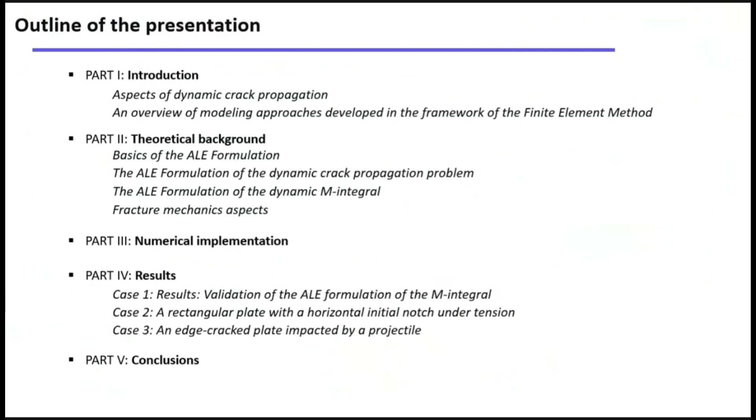Here is the summary of the presentation. The presentation is structured in 5 parts. In part 1, I will explain the motivation of this work. In part 2, I will resume the theoretical background at the base of the proposed numerical model. In part 3, I will discuss some aspects concerning the numerical implementation. In part 4, I will show you some interesting results that we have obtained by applying our methodology to the analysis of some relevant benchmark cases. And finally, in part 5, I will outline the main conclusions of the work.

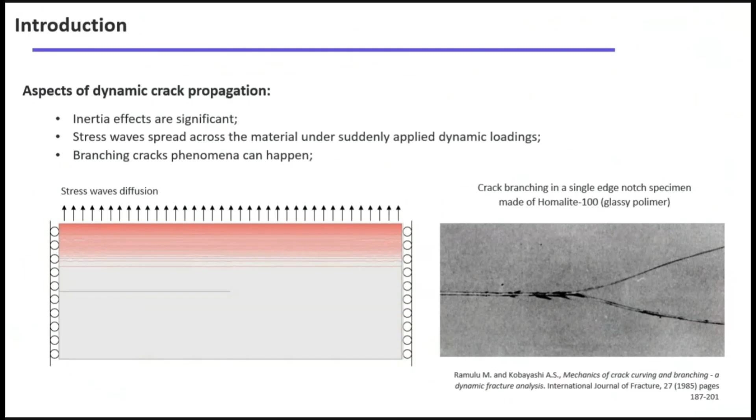As you can imagine, simulating this kind of phenomena using a numerical method could be a very challenging task. In the literature, you can find many numerical methods that tackle this problem. Here I try to broadly classify these methods according to the way they represent the crack. You can find smeared crack approaches and discrete approaches. Smeared crack approaches account for the presence of the crack at the constitutive level, meaning this method, in the region of the crack, reduces the elastic properties of the material. An example is the phase field method. On the other hand, discrete approaches represent the crack as an internal geometrical discontinuity. An example are models based on the cohesive zone models, and these models offer a very accurate representation of cracks.

However, each method, regardless of whether it belongs to the class of smeared crack approaches or discrete approaches, has advantages and disadvantages. So currently, it is impossible to identify the best numerical method that ensures accurate results and at the same time high computational efficiency. During the last years, many efforts have been spent to develop a novel class of numerical methods, the so-called hybrid methods, that combine standard procedures to take the most advantages while reducing the main drawbacks. So hybrid methods are very promising and could be considered the future of computational fracture mechanics.

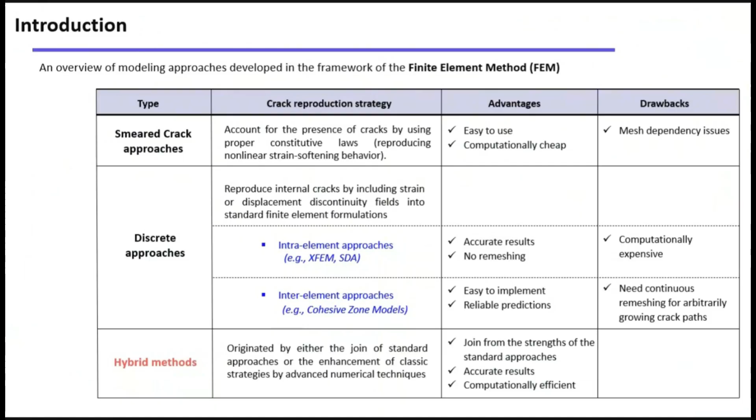In this framework, we have tried to develop a hybrid method to simulate dynamic crack propagation mechanisms inside brittle materials. In particular, the proposed method has been developed within a standard finite element code, augmented with the use of the moving mesh technique based on the arbitrary Lagrangian-Eulerian formulation. This technique is used to reproduce the geometry variation of the computational domain due to the propagating crack. In addition, we have implemented the interaction integral method. This is used in the proposed method to evaluate essential fracture variables, I mean the dynamic stress intensity factors, which are essential to evaluate the direction of propagation and also the crack propagation velocity.

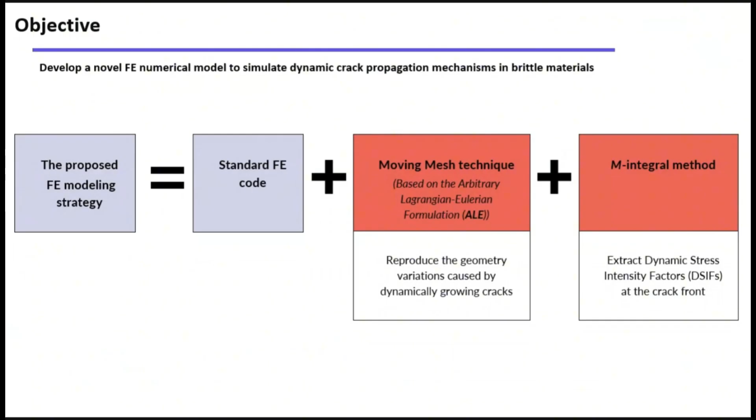So before introducing the governing equations at the base of the proposed numerical method, it's useful to explain some basic concepts at the base of the Arbitrary Lagrangian-Eulerian formulation. The use of the Arbitrary Lagrangian-Eulerian formulation introduces a novel system of coordinates that coexists with the traditional material and spatial frame. The novel system is known as the referential system, and the referential coordinates identify the spatial position of the nodes of the computational mesh.

Each system, I mean the material, spatial, and referential system, are linked to each other by means of a proper set of mapping functions. In addition, the use of the ALE formulation requires that all the governing equations of the problem under investigation should be stated in the referential system. This means that traditional governing equations, for example of solid mechanics, that are expressed in the material frame, should be restated in the referential system.

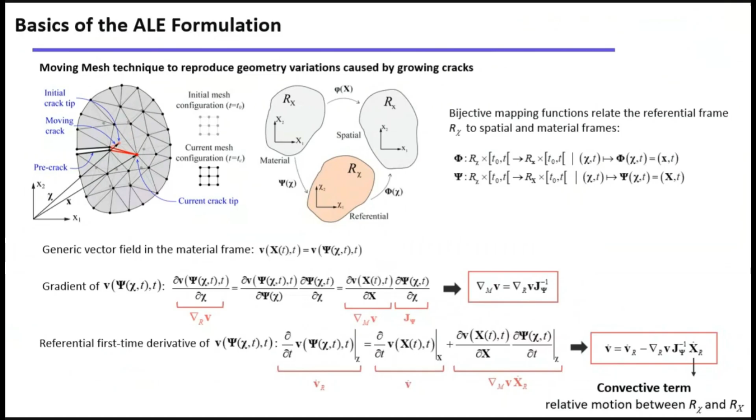If we consider that these equations contain gradient operators or first-time derivatives, these operators should be stated in the referential system. So we can use these expressions, the relationship that links the gradient and the first-time derivative from the material to the referential frame. Taking this expression in mind, we are now ready to introduce the governing equations at the base of the proposed numerical methods.

In particular, we have two sets of governing equations. The first are the governing equations on solid mechanics, expressed in weak form with respect to the material frame. Using the above expression, we are able to define these governing equations in the referential frame.

The second set of governing equations are those associated to the moving mesh problems and govern the kinematics of the movement of the computational nodes. These governing equations are generally known as Rezoning methods, and here we have used a Rezoning method based on a Laplace approach.

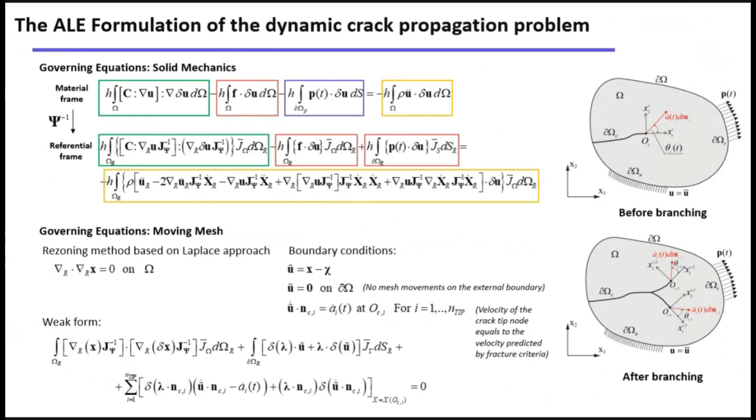So we have to solve these differential equations under a proper set of boundary conditions. In particular, we use a boundary condition that imposes that the computational nodes around the boundary of the computational domain should be fixed. Another boundary condition imposes that the computational node associated to a crack tip advances in the direction of propagation, with a certain crack propagation velocity evaluated using proper fracture criteria.

Another important concept is the use of the interaction integral method. The interaction integral method is derived by applying the traditional J-integral expression to a superimposed state formed by the combination of the fields of the problem under investigation—I mean the stress, displacement, and deformation fields—and auxiliary fields for which stress intensity factors are known.

To evaluate the dynamic stress intensity factor of the problem under investigation, one has to evaluate two main integral expressions: the first associated to an auxiliary field of pure Mode 1, and the second to an auxiliary field of pure Mode 2. So we get two values of the interaction integral, and these values allow us to evaluate the dynamic stress intensity factors of the problem under investigation.

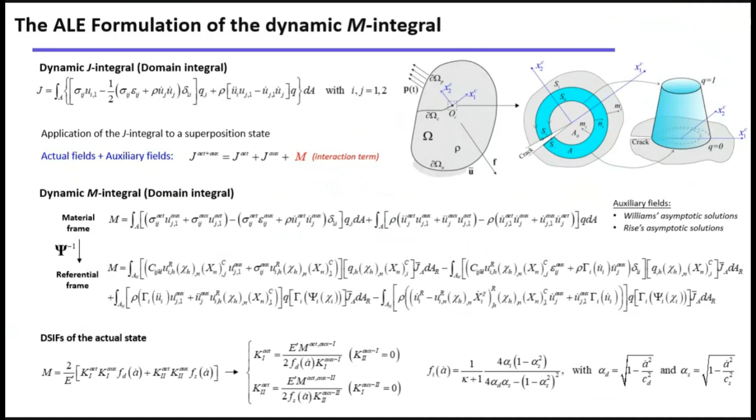How does the proposed model evaluate the direction of propagation? We have used the maximum circumferential stress criterion developed by Erdogan and Sih, and this criterion provides an expression for the kinking angle that defines the direction of propagation, as well as an equivalent stress intensity factor that we use to define several fracture functions governing the crack initiation instant and the crack growth process.

These functions are defined in terms of some material properties, namely the dynamic crack initiation toughness and the dynamic crack growth toughness. In addition, we have introduced fracture functions that define the instant of crack branching.

In particular, the proposed method is quite flexible to implement fracture functions based on the velocity criterion—that is, when the crack propagation velocity reaches a critical value, crack branching events occur—or fracture functions based on the critical value of the stress intensity factors.

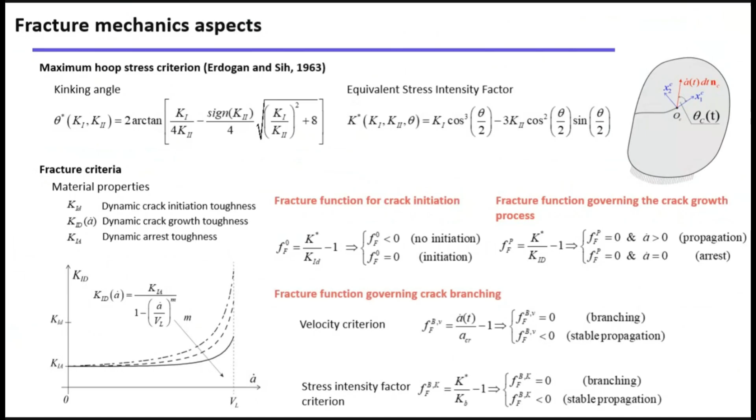Now I'll show you some aspects concerning the numerical implementation. We have implemented the proposed method within a standard finite element code, and we have developed an algorithm that manages the propagation process automatically. Here you can see a flowchart that summarizes the steps followed by the proposed algorithm to reproduce the dynamic crack propagation process.

At the start, the user should provide the model with basic information regarding the geometry of the computational domain and the material properties. It's important that the computational domain, or the geometry, be a pre-cracked domain, because we use the interaction integral method, and this method can only be applied to a pre-cracked domain.

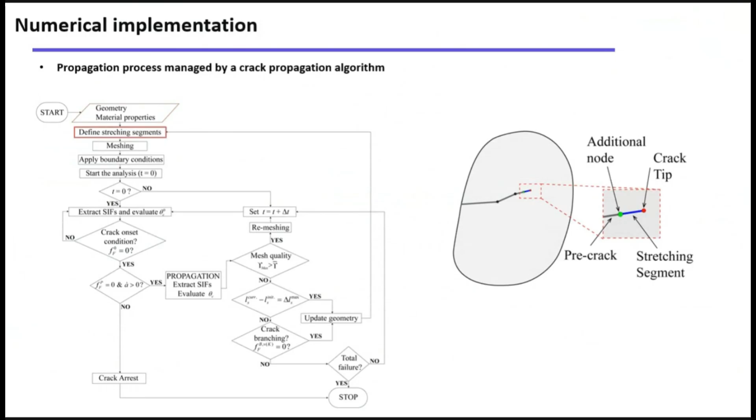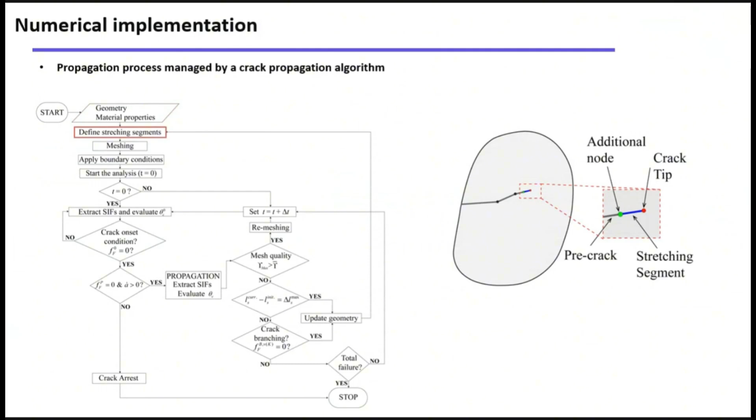After that, the code starts to work, and initially it performs a geometric operation on the geometric entity that depicts the internal pre-crack. In particular, it adds an additional node to the crack tip, forming a short segment that during the simulation will stretch in the direction of propagation, thus reproducing the crack growth process. After that, the code meshes the geometry, and the analysis starts.

At the beginning, for each time step of the simulation, the code checks the occurrence of crack initiation, and when these conditions are satisfied, the propagation process takes place. The computational node associated with the crack tip advances in the direction of crack propagation.

As you can see in this animation, the finite element around the crack tip distorts due to the movement of the computational node, and this distortion is monitored by the algorithms. When the distortions of the finite element become high, a remeshing action takes place. So the proposed method, different from traditional finite element procedures that perform remeshing for each increment of the crack,

performs a remeshing action only when the distortions of the finite element become excessive. Another aspect monitored by the proposed code is the extension of the stretching segment. When the stretching segment reaches a prefixed extension, the code arrests the analysis, takes the configuration of the geometry and mesh as a new geometry, creates another stretching segment, and restarts the analysis.

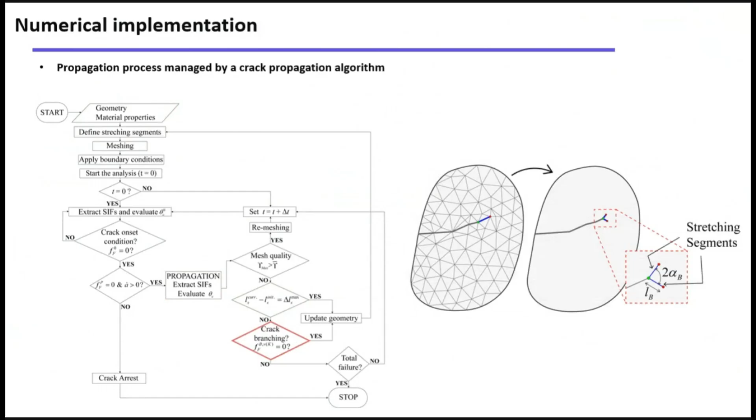Another thing is the control of crack branching events. In this case, the code arrests the analysis and creates a novel geometry by inserting two segments that reproduce the splitting of the initial propagating crack. This process continues until the total failure condition of the problem under investigation occurs.

This is a particular case because the code doesn't evaluate the crack propagation velocity here; the crack propagation velocity is imposed. In this case, we have the analytical solution of this problem, in particular the time history of the mode 1 stress intensity factor.

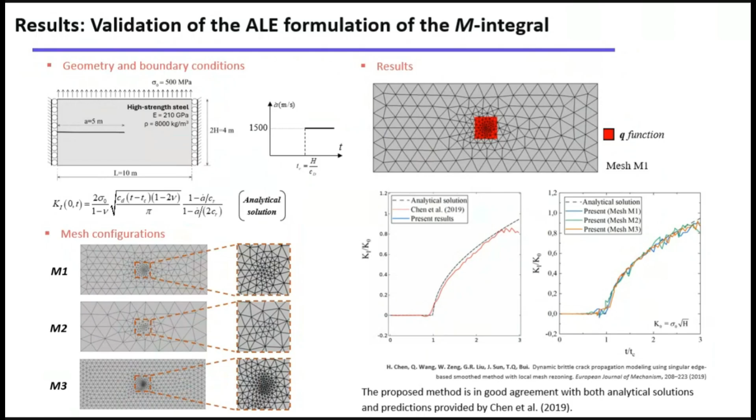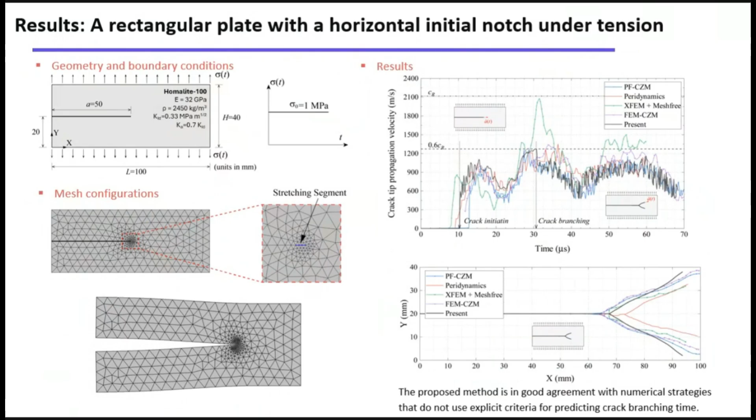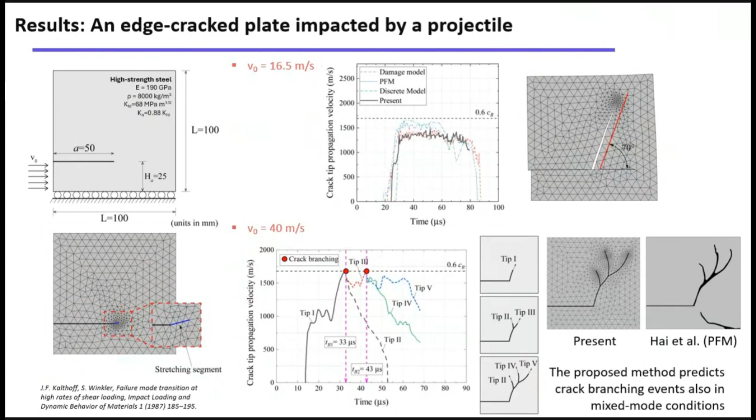So just to conclude with this work, I've shown you a novel model to simulate dynamic crack propagation mechanisms inside brittle materials. The proposed model combines a standard finite element code with a moving mesh technique and the interaction integral method. In particular, the results have shown that the Arbitrary Lagrangian-Eulerian formulation of the interaction integral ensures accurate results, and also the proposed method ensures accurate predictions for simple and complex crack problems.

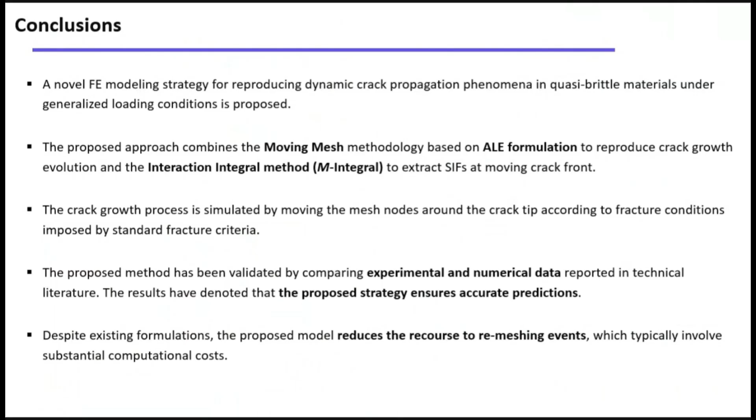Different from a traditional finite element method, the proposed method improves computational efficiency because it performs remeshing of the computational domain only when the finite element distorts excessively. Thank you for your attention.